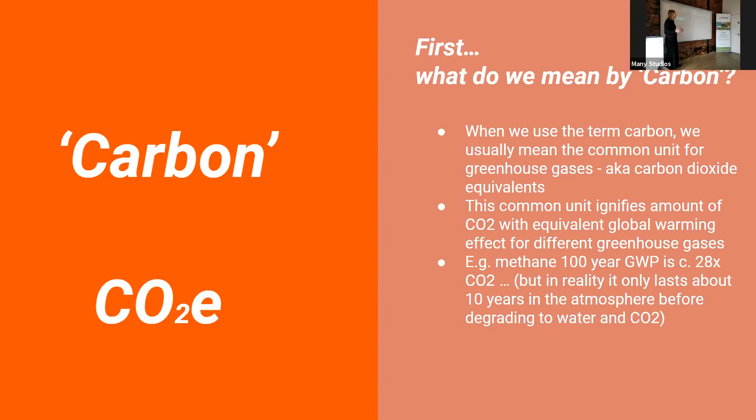But first, I think it's worth just clarifying, when we're talking about carbon today, what do we mean by carbon? Often you'll see it look like this with a little E next to carbon. And really, when we're talking about carbon, we're meaning a common unit for greenhouse gases. So we're not just talking about carbon, we're talking all greenhouse gases, all of these together, and they're measured in such a way that they are comparable in terms of carbon. So I just wanted to clear that up before I keep using the term carbon throughout my talk.

We all know the scale of the problem and the amount of change that is needed. The recent IPCC report this year flagged how our current policy scenario is putting us on track for an above 1.5 degree future scenario. And even with significant improvements to the current policy scenario, it's looking increasingly risky that we might be above the 1.5 degree range. So the rapid scale of decarbonisation that we need to make is really, really vast. And that's why it's so important that we're here in Glasgow for COP26.

In terms of a global picture, the UK historically is responsible for a really significant amount of the global cumulative carbon emissions that have been created. And also, if we look at a global picture in terms of equality and inequality, the poorest 50% of people are only responsible for around 10% of total lifestyle consumption emissions, and it's the richest 10% who are responsible for almost 50% of global carbon emissions.

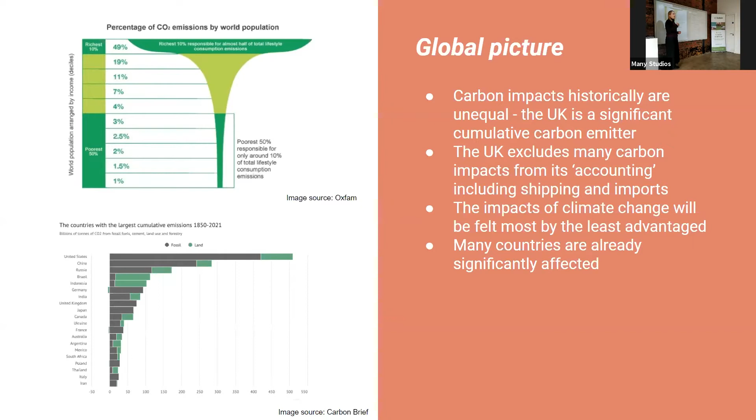So we, as people living a rich, comfortable lifestyle in the UK compared to the rest of the world, have a huge responsibility to do what we can to improve this situation and help those who have less than we do to benefit from future growth and change in their countries.

The UK GBC have set out 3 definitions for net zero: net zero carbon in terms of construction, net zero carbon in terms of operational energy, and then whole life net zero carbon. You need to be really careful when you hear people talking about delivering net zero to really challenge what scope are you measuring. Are you talking about just operational, just the energy that your building's using?

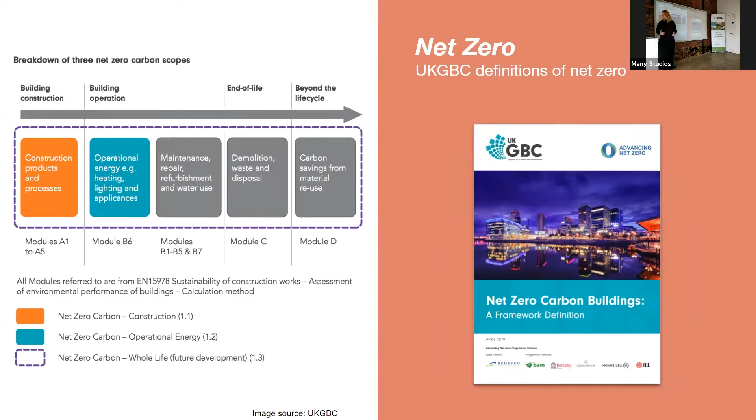Or are you talking about construction products, the actual embodied carbon that goes into making buildings? And are you talking about end of life of your building and the maintenance and repair that goes into it? We can't just be looking at a small portion of carbon now, we need to be looking at everything.

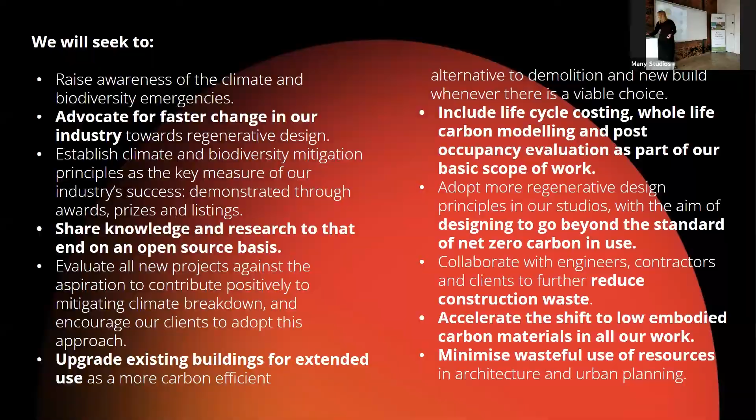So in 2019, Architects Declare was founded, and I think this was a turning point for our industry in terms of understanding and platforming embodied and whole life carbon as an issue. And I've put in bold here all of the declaration points that allude to that. And LETI's Embodied Carbon Primer was released in 2020, of which I was one of the authors. And this was another landmark piece of guidance, which I think has really created a step change in knowledge in our industry.

And as that circle gets smaller and smaller, that will become the bigger and bigger portion, and most of that increased slice of the pie is coming from the upfront embodied carbon associated with the materials and how we construct our buildings. So whole life carbon, there are industry agreed standards on how we measure embodied carbon, and I hope you're familiar with this, which is the whole life assessment matrix.

So everything in this area here is upfront carbon. So that's everything that happens before your building's even had its front door key opened. And then everything in this orange box is embodied carbon. So upfront is part of embodied, but they're not the same terms. And embodied carbon includes everything up to the end of life of the building, while whole life carbon encompasses that, as well as the operational carbon. And for infrastructure, it also incorporates user carbon, I think, for which there are emerging standards coming forward.

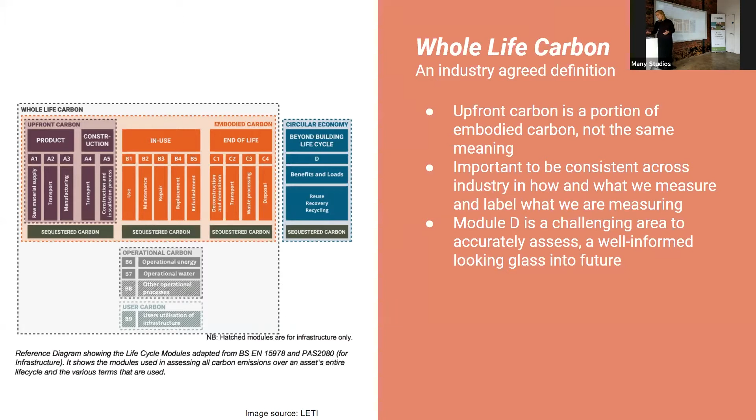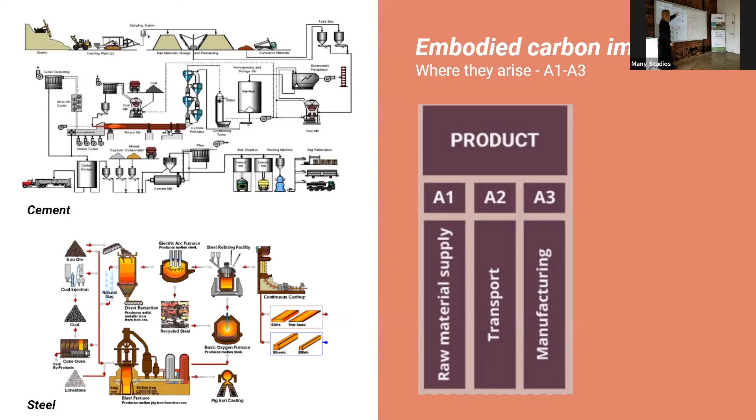All of these energy forms add up to create an embodied carbon that ends up in how you made your material that you see before you. So this concrete here went through all of these things in order to be here. And that's what we mean about embodied carbon. And most of that on those pages are fossil fuel driven at the moment.

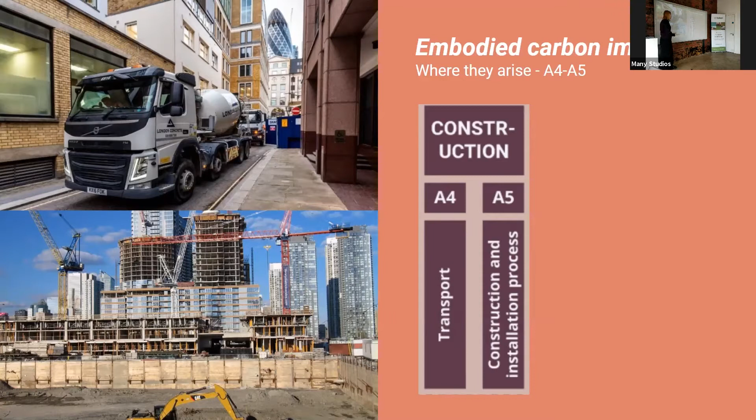Embodied carbon impacts then in A4 to A5, we're talking about on-site and transporting those materials to site, and then the processes of constructing our buildings. So any waste generated through that process, that would count in here. And also just how much energy it takes to construct our buildings, whether that's vehicles driving around in petrol and diesel vans or whatnot.

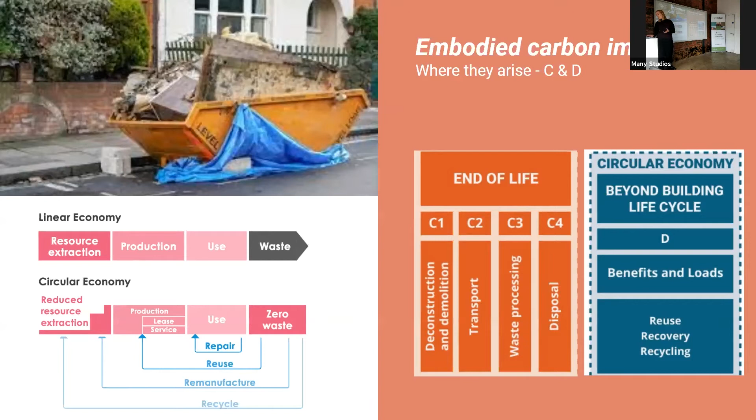And the big question for those materials is then what happens in module D and the end of life scenario. Do we keep those buildings in place for hundreds of years, in which case that's locked away, that's great, or do we send them to a landfill where they're likely to be incinerated, where they'll release a lot of carbon? That's a big question mark, which I'm sure Andrew will touch on. At the moment, we produce a huge amount of the UK's waste, and we reuse very, very few construction materials after their first life.

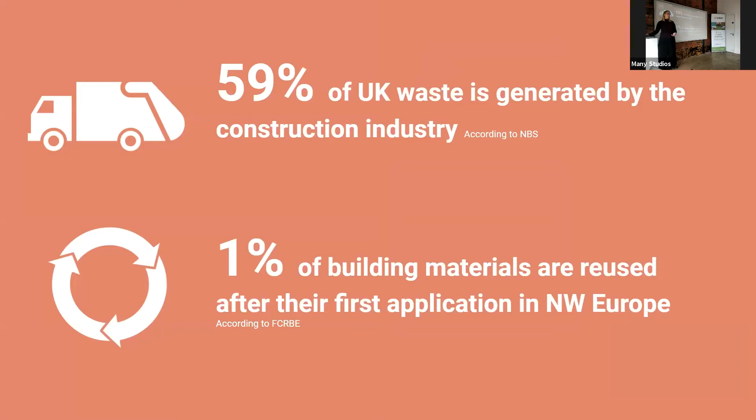And we're just producing more and more waste. So this is a huge issue that we need to address. There's loads of embodied carbon material out there.

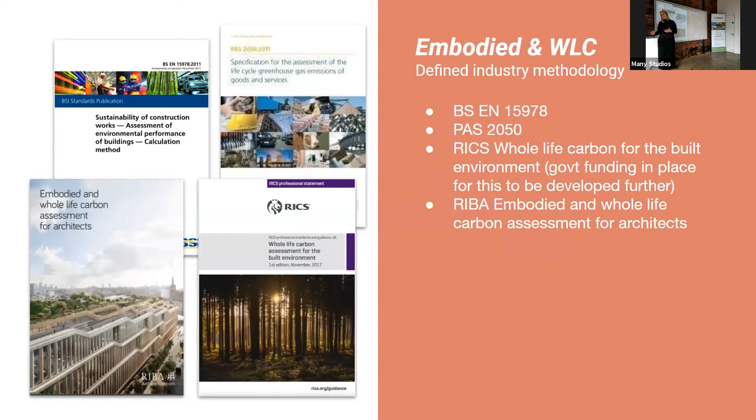These are some examples where you can look for industry agreed methodology. For us, it's probably worth looking at RIBA's Embodied and Whole Life Carbon Assessment for Architects. Essentially the fundamental calculation is you're calculating how much stuff you've designed, the carbon impact per unit of that stuff.

And timesing them together, you get the environmental impact of your building in terms of carbon. You'll find online lots of different sources for embodied carbon statistics for different materials. A good source is the ICE database, which is generic data that's really well researched. But this is a visual illustration, which I'm sure some of you will have seen, the material pyramid on materialepyramiden.dk, and it really visually shows you the different embodied impacts of different materials on a singular basis.

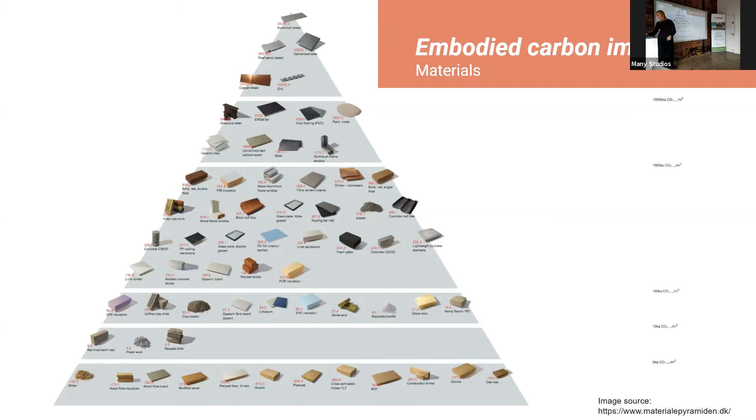But there are also tools emerging that make the job a lot easier for you, and quite a lot of really good free ones. The top tool here is HBERT, which was developed by Hawkins Brown, and the bottom tool is by Feilden Clegg Bradley Studios. This one's Revit based, really good if you've already got your model in Revit, so you might be at a later design stage maybe.

This one's really good for really early stage testing in an Excel format. So there are different tools emerging and coming forward, and there's lots available.

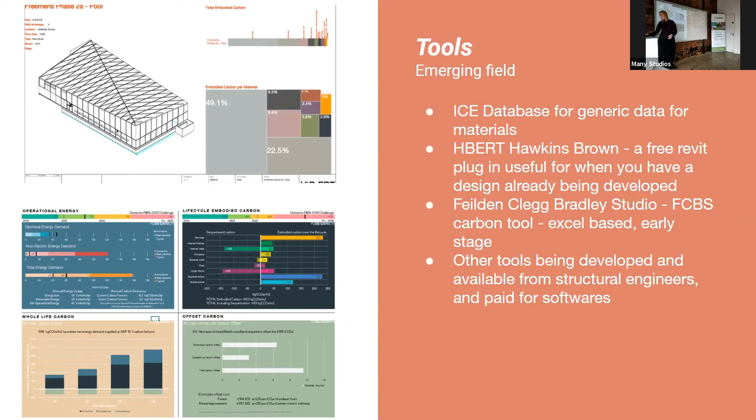But when do your decisions matter most? Really, the earlier decisions about whether we should even build this building, that's where you make the biggest carbon impact. And as soon as you start moving through the design stages, once you set your form, your volume, your heights, your spans, then you're locking in carbon impact, and it gets very difficult through the later design stages to really improve the carbon picture much.

You make a narrower and narrower scope of improvement for yourself, especially when you're on site—it's too late, you can only substitute the odd material. So it's really important to be thinking about this from day one on any design project.

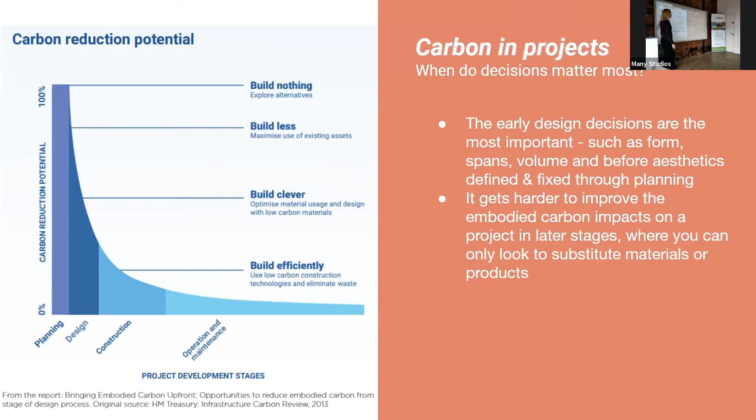So there's lots of really practical guidance out there. On the whole, if you can build less and build light, you're doing a really good job and getting going. Then it's all about building wise and trying to really improve big ticket items, which I'll show you in a sec. For example, in a normal building, your upper floors, your foundation and your envelope are really big ticket items, and there's huge potential for you to reduce the embodied carbon in these components.

And if you can engage with your whole design team, particularly structural engineers, in the early design stages, to explore options that will reduce this, then you're making really good progress to reduce the embodied carbon.

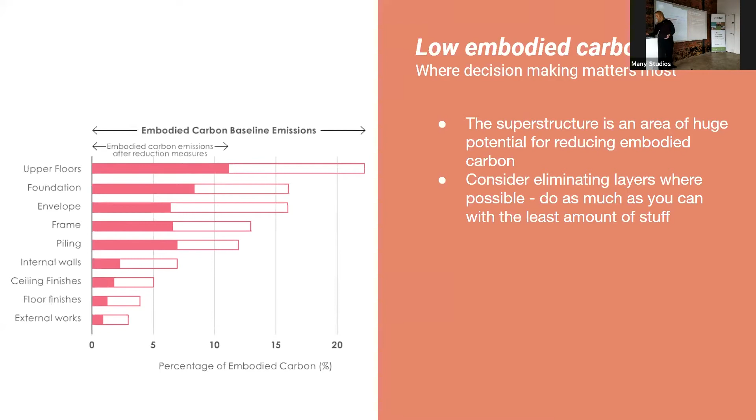That's not to say that internal finishes and smaller components don't matter, because over a whole life picture, they really, really do matter. And if you're able to eliminate anything at all, and make, for example, self-finishing materials used to limit the need for extra internal finishes, then that's a really good step as well. For example, the Cork House is an example of where the structure is acting as the final finish, and you've eliminated a layer of stuff.

For example, this is our Sky Health and Fitness Centre, designed by DRMM. Again, you see that the timber is acting as the final finish. There's nothing concealing the MEP work, we've left it all exposed, and it's as minimal as you can be in terms of the amount of layers of stuff in a building. That's what we want to see. We want to see materials working really hard to do many things: structure, aesthetics, shading, whatever. We want to be doing as many things with as little stuff as possible.

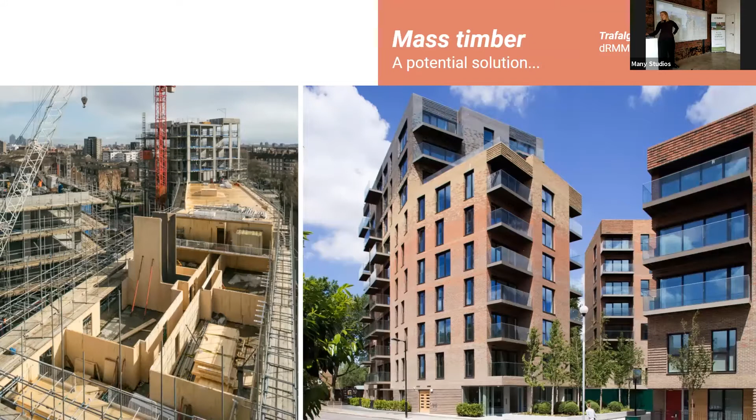With tall buildings, it gets really hard to limit your embodied carbon. Once you get beyond 12 stories, you're a bit stuck really, and you start to see really extreme diminishing returns in terms of what you can do. That said, timber is potentially a solution for taller buildings, and here's an example of a project we did in London, a tallish building in CLT. Unfortunately, legislation is making that difficult at the moment.

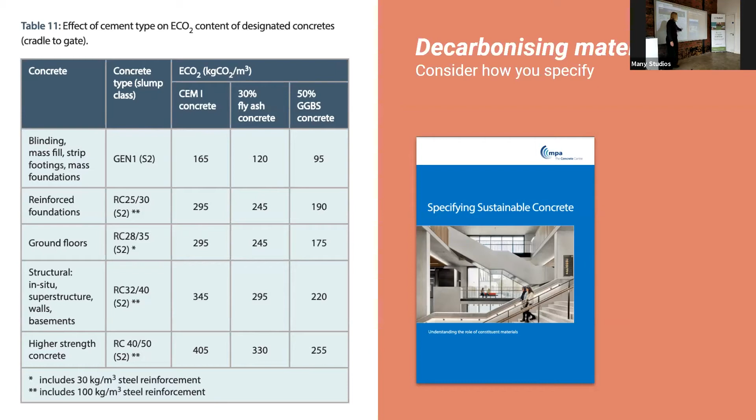It's also really important that we're not just talking about timber. We all use concrete, even those of us in the room who are designing in timber have concrete foundations. So we need to be engaging with what's best practice for concrete. This is from the Concrete Centre, a really useful piece of guidance showing you how you can reduce your embodied carbon impact through sensible specification of cement alternatives.

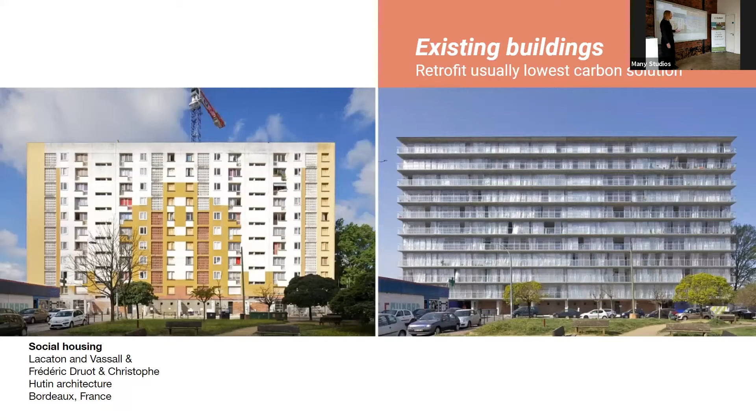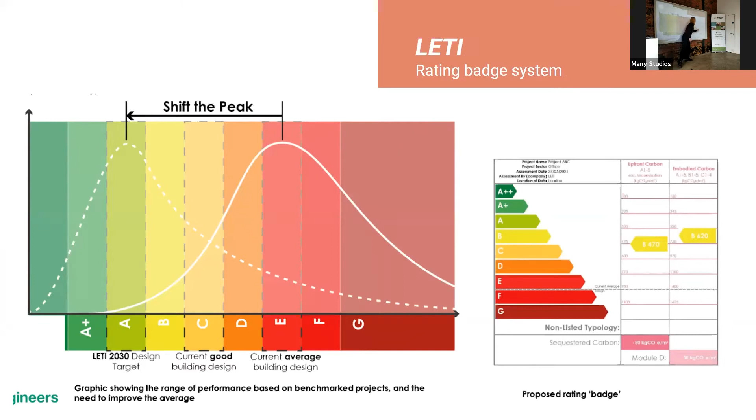You've probably seen the RIBA benchmarks. It's really important for us all to be working towards these, and also feeding back data so that RIBA can keep improving it. LETI have a rating badge system, which we've recently launched, which helps to visualize how good my building is. This has got a close relationship back to those RIBA targets.

Bennetts Associates, I think the first practice to actually do this, have measured their building's impacts on two projects against the LETI benchmarks and been really open and transparent about how they're doing. I think we all need to be a lot more transparent about how we're doing, even if the outcome isn't what we want to see. This is the kind of LETI input form used to do the benchmarking exercise.

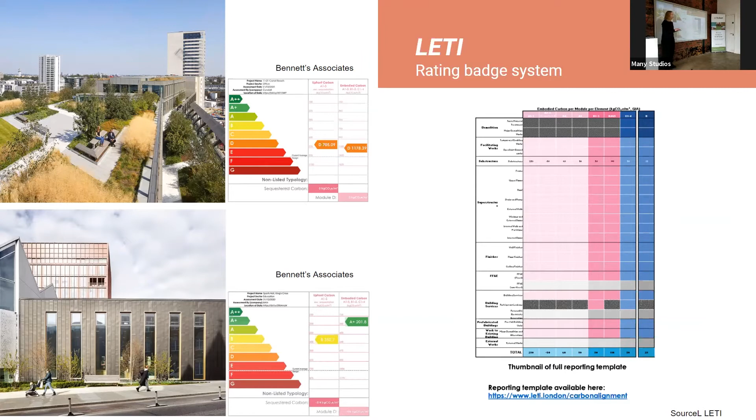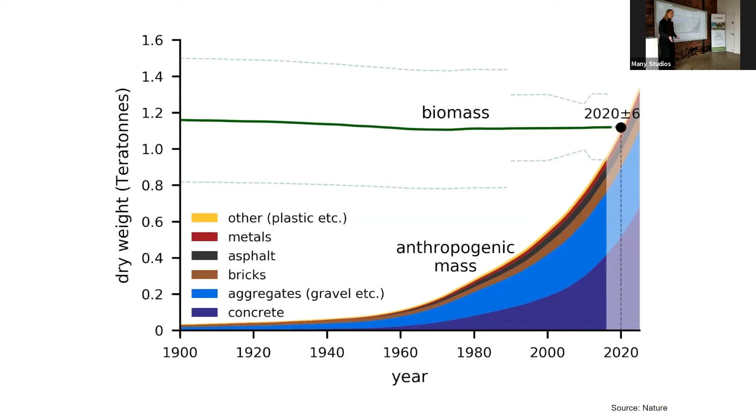We also now have more man-made materials on Earth than there is natural flora and fauna. We've got so much stuff. So I urge you to please try to find ways of using what's already here rather than making new stuff, because we're also at risk of using up finite resources. We can decarbonize concrete, but we're also running out of sand. We're using it at such a rate that nature can't replenish it anymore, and it's a depleting resource.

Also, our electrification of society relies on materials like lithium, which again are rare and finite resources, and the extraction processes for those are not always positive.

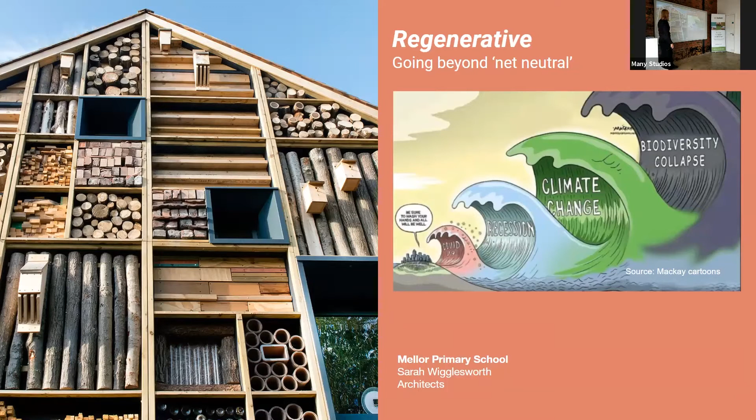So I urge you, when you're thinking about embodied carbon, to still be thinking about how to make buildings for nature. This, I think, by Sarah Wigglesworth Architects, is a good example of a low embodied carbon system, which is more than just a facade. It's also home for nature to live and thrive.

And we can also start to think at a system level about how nature feeds into the carbon system. So thinking about how we're designing for street trees and for green roofs, and the carbon sequestration that they're able to create and contribute to our systems in cities.

But we need to be really careful when we're talking about introducing, for example, green roofs, that we're conscious of the tradeoff between embodied carbon and regenerative benefits. If we're starting to plant trees on buildings, think about the impact that that's going to have on your structural design. We've got some tricky tensions in play here, and I think it's just really worth engaging with them on every project and seeing what the best thing you can do is.

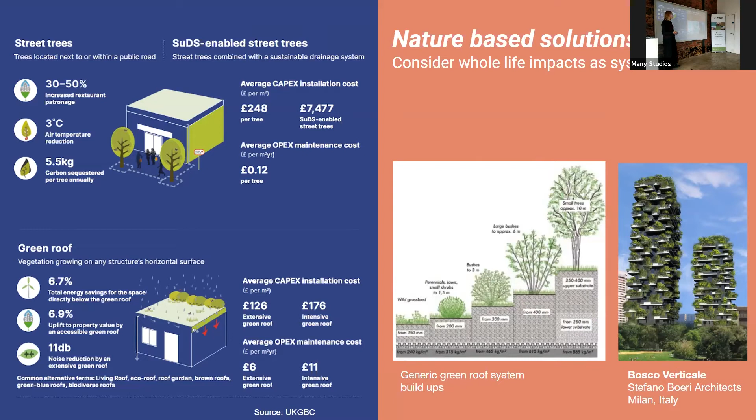Personally, I think trees are probably best left in the ground, but that's just my view. And also just to remember that our climate is changing. There's no use us designing buildings now that in 30 years can't tolerate the heat.

We need to be designing to future weather files, and we need to be designing to consider how people will keep cool and how people will actually live and work in our cities. Otherwise, we're at risk of, again, building redundancy into a system that's already flawed enough as it is.

So yeah, I think that's me done. Thank you very much.

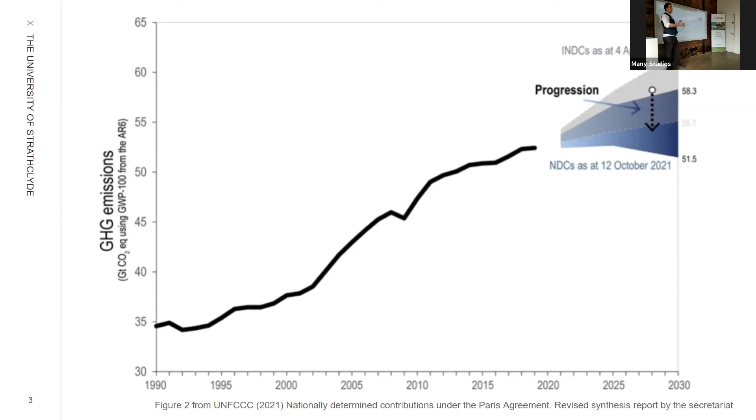What we have, though, when you zoom out to the longer term, is this huge gap between the nationally determined contributions up here and the kinds of pathways we need to be on to get down to 2 degrees or 1.5 degrees. All of the commitments we've been seeing are things around 2050, 2060, 2070 net zero targets. So there is still this huge gap in terms of near-term action that we need to close - and that's one of the key things we're talking about over the next two weeks.

Longer term, though, the good news comes from a lot of the commitments brought forward in the last couple of days. The analysis on screen here was done prior to the COP. There was an updated version published this morning, which I didn't have time to add into the slides yet - done by a different group doing the same sorts of analysis. It suggested that the long-term targets we've come forward with now, if you assume a fairly optimistic interpretation about everybody fulfilling all of them, and the trajectory you assume along that, that actually comes down now to about 1.9 degrees.

So this is the first time we've had a set of global commitments that notionally could bring that 2-degree goal back into play - and that's as of this morning. Now, obviously, there's still a huge challenge in delivering all of those reductions, delivering upon all of those targets and so on, but that's how far we've moved in those 6 years since Paris. The big challenge, though, is closing that near-term gap - getting us back down onto those pathways over the next decade or so.

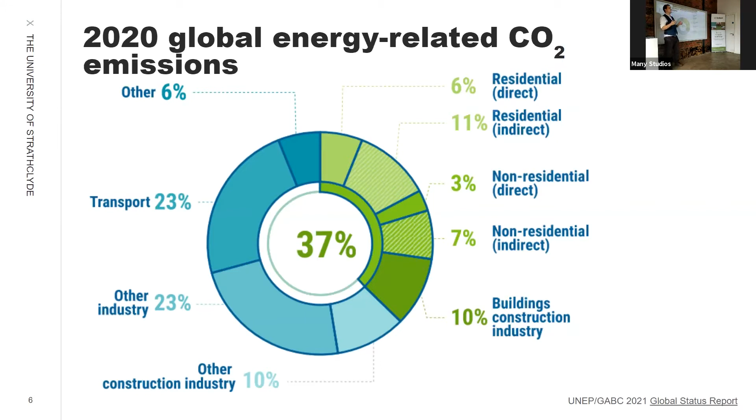The one thing I would say is anytime you see somebody quote that 10% figure, always think about what that includes, because historically it has basically included the impact of material production. It hasn't included things like the impact of transporting all those materials to site. So 10% is really a lower bound—really you're talking about 20%.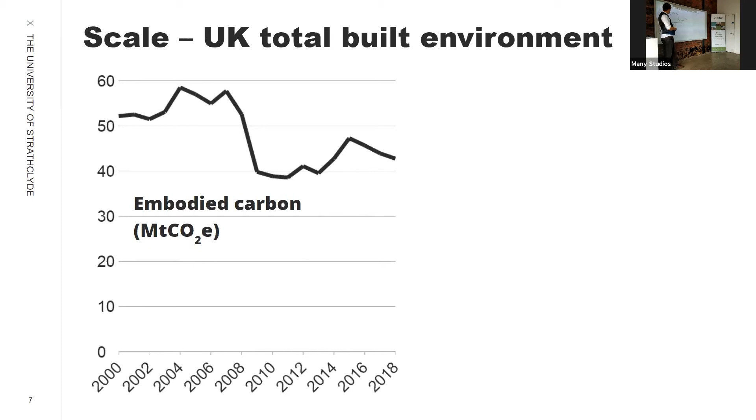What's actually underlying that is two trends: increases in what we're building, and reductions in the carbon intensity of the supply chain—the production of materials and so on. There's a couple of interesting things to point out with these two competing trends that have left us on a broadly flat overall trend.

That's essentially the global financial crisis, where we had the worst and fourth worst annual drops in construction output in the UK on record, in the space of a very short period. That was the only period where we actually made any substantial reductions in our total embodied carbon, because quite simply we stopped building. Since then, construction output has returned back up towards where it was before—we're building again.

And we've had a slowing of the improvements in the carbon intensity of supply chains. Back in the 90s and early 2000s, there was lots of easy stuff you could do—taking coal off the grid, the kinds of transformations we saw in the cement industry. Now we're having much more gradual, slower gains in carbon intensity.

So going forward, you've got to do one of two things. You either have to massively accelerate the reduction in the carbon intensity of supply chains—there's lots of discussion about technologies like carbon capture and storage and hydrogen steel that might do that—but you also have to think about how much we're going to be building in future, because it's those two things that will really determine what trend this follows going forward.

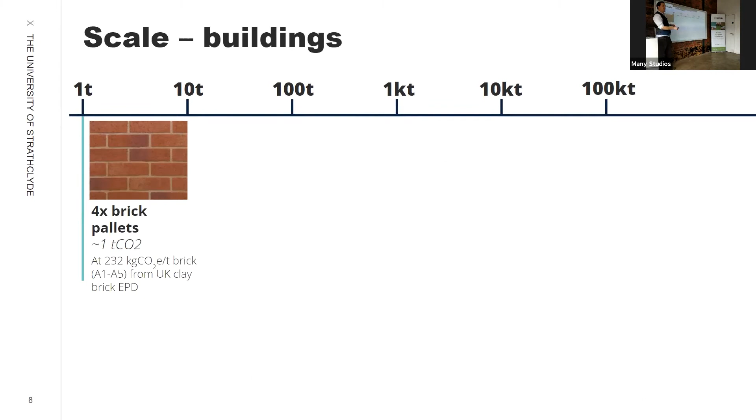Just to give you a sense, from a ton all the way up: 1 ton of embodied carbon in the UK at the moment will probably get you about 4 pallets of bricks. I've assumed if you turned up to an event like this, you know what a pallet of bricks looks like—that's 1 ton, so keep that in your head. That's for UK average bricks at the moment.

By the time you get to like 10 tons or 100 tons, you're probably talking about 1 very large house or 2 small green ones. By the time you're working your way up towards hundreds of tons or 1,000 tons, you're probably talking about small to mid-sized, or particularly green, commercial developments.

For example, Kat mentioned this great new timber sports hall that Bennetts has done. That 709 tons CO2 upfront carbon sequesters 638 of that in the timber, so you can see the kind of scale of potential benefit there if you want to include that.

Once you get beyond 1,000 tons, 10,000 tons, etc., you're talking about quite large commercial developments. For instance, here's 5 Broadgate, if anyone's familiar with that—more like 50,000 tons of CO2 upfront to practical completion there.

And if you're working for a client organization, you might be talking beyond that in terms of your pipeline. For instance, Landsec have started recently publishing what the estimated embodied carbon of their development pipeline is, which I really applaud them for doing.

But there you're talking, you know, a couple 100,000 tons of embodied carbon in their next 6 developments. And so that's the sort of, you know, scale that you can influence if you're working in this industry.

If you work on infrastructure assets, oh, sorry, this little blue dot is kind of like what Kat was saying before of, if I lived twice as carbon intensive a lifestyle as I do, and nobody decarbonized any of those activities in the future, and I live to be 100, which as a Glaswegian male is statistically very unlikely, then that is maybe where at the worst case scenario I could get my personal carbon footprint to. So almost everything you're working on will be an order of magnitude or more bigger.

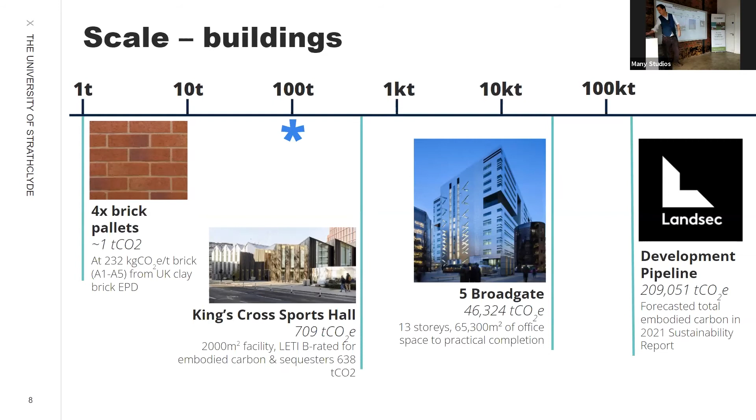And if you work on infrastructure, that scale really starts at 10,000 tons and goes up from there. So, you know, 100,000 tons probably gets you a couple of miles of motorway with a junction at either end. By the time you get to 1 million tons, you're talking about the biggest road building project in the UK in the last few years.

Beyond 1 million tons, a few million tons might get you a third runway at Heathrow. And if you go past 10 million tons, you're really only talking about mega projects like HS2. So that's your kind of top end of the spectrum in terms of carbon scale.

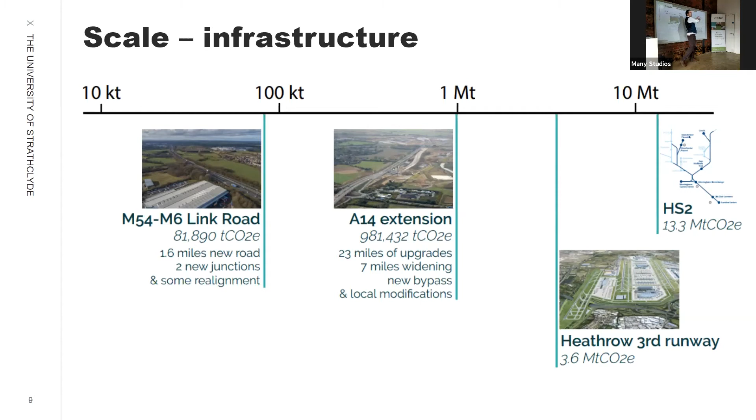The general approach that these European countries are taking is essentially come up with some sort of roadmap at the start, give a bit of clarity to the industry on what's going to happen going forward, and say, okay, from this date, we're going to require you to report your embodied carbon on all your projects, or all your projects above a certain size. On those projects, we'll ask for you to report against a standard methodology. We'll give you tools to do this. We will give you a national database. We will give you a national methodology, etc.

You follow those. Once we've gathered that data for a period of time, typically that seems to be a few years, then we'll start setting limits based on that data that's returned to us. And we'll say your building has to be below this many kilograms of CO2e per square meter, etc. And that whole process of development, from first saying we're going to take action on this through to setting limits and so on, that's going to be a multi-year process for all of these kinds of countries. The Dutch have kind of already done it, but they're sort of the outlier in terms of having cracked on with this a decade ago.

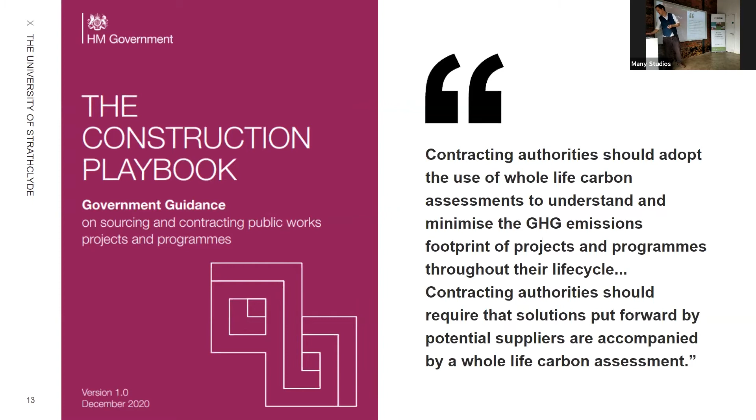The net zero strategy, which came out a couple of weeks ago, represents a little bit of a move forward, and it actually mentions embodied carbon. And it puts out this statement essentially saying the government aims to support action in this, improving on reporting with a view to exploring a maximum level for new builds in the future. Now, there's no real specific timeline or actions for development of that in the strategy.

And that was backed up in their recent response to the Committee on Climate Change. Sorry, that's a really old way of talking about it. The Climate Change Committee, I always forget they rebranded. Every year they submit a progress report to Parliament, which includes a bunch of specific recommendations to different departments. Every year for the last 3 years, they have said you should include embodied carbon and start measuring and reducing that. And you need the regulations in order to do that.

Last year, the equivalent statement was essentially a fob off of saying, well, we would need a methodology to be able to do that, to which the response was, well, there's all the methodologies on Kat's slide before, the RICS statement that's been there for 4 years, etc. This year, it was a really distinct evolution because it basically said, yeah, we expect to do something on this in the future. What that will be and what the timeline is at the moment remains unknown.

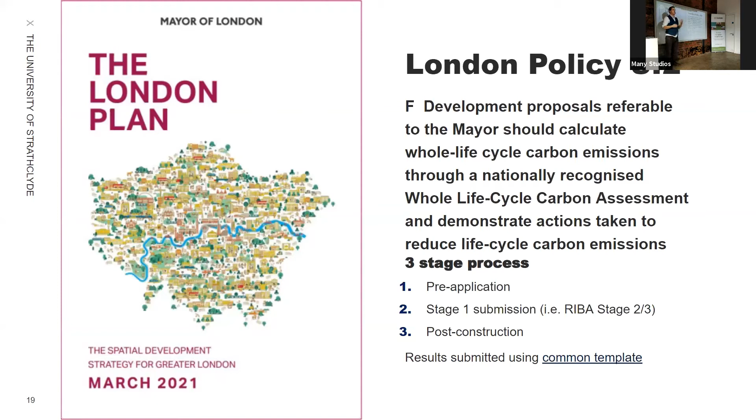Now, they haven't yet taken a position on what they'll do with this data over time, but if they're following the same sort of model as all of those European countries I mentioned before, then you would assume over time you would use that data to then form the basis of limits for future projects.

As Joe mentioned, if you think we should be including embodied carbon in building regulations, I strongly recommend you go to part-z.uk, where you can read a set of proposals from a group of us from the industry. And, well, yeah, I will count myself as the industry, even though I'm an academic. Maybe I'm the token academic on this one.

This is basically a set of proposals around exactly what the wording of the building regulations could look like, what an approved document would look like for it, and a whole lot of commentary that sets out why we've written it like that. What we've been doing throughout this whole process since we launched this is gathering feedback from absolutely everybody who wants to speak to us about it.

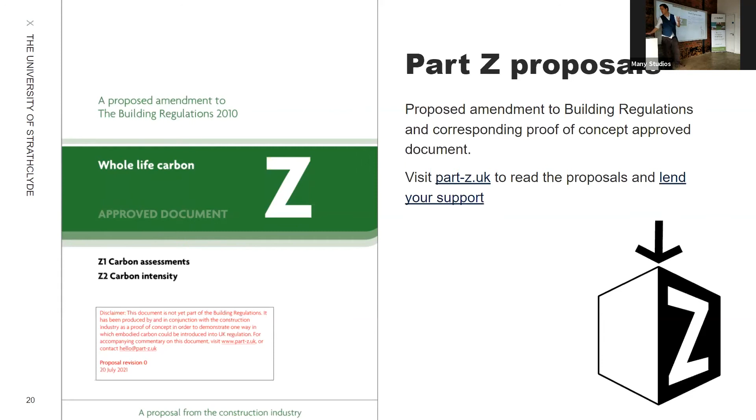And I'd say the broad thing from that is a general consensus that this is a good thing to do. We should do it. We now have over 114 statements of support on the website from different companies, lots of household names, everything from SMEs up to, we've now added the UK's largest active asset manager. In the last week, we have several of the UK's top 10 contractors on there. We have statements of support from RIBA, IStructE, CIBSE, etc.

So I think we can try and build a reasonable consensus about this, and we're having a parliamentary launch of this the week after COP finishes. So the more support we can demonstrate at that and say, look, there is real widespread industry support for this, the better. So please consider submitting a statement of support if you haven't already.

2 final quick plugs if you're around for the rest of this week or next week for the COP.

The UK Green Building Council will be launching their net zero whole life carbon roadmap for the UK built environment on Thursday of next week, which sets out a whole package of analysis and policy recommendations, not just about embodied carbon, but also operational carbon and what we need to do about it. You can sign up to it, it'll be streamed. It's in the Blue Zone if you want to attend and have a delegate pass. If not, I think you can stream it online.

Tomorrow night, the UK Green Building Council are launching their Scottish regional branch. I'll be along at that, hopefully to see some of you there to talk about whether we could do a Part Z for the Scottish regs, and whether we could get a group together to do it. So that's all from me. Download the slides and hopefully see them in a bit more detail. Thanks very much.

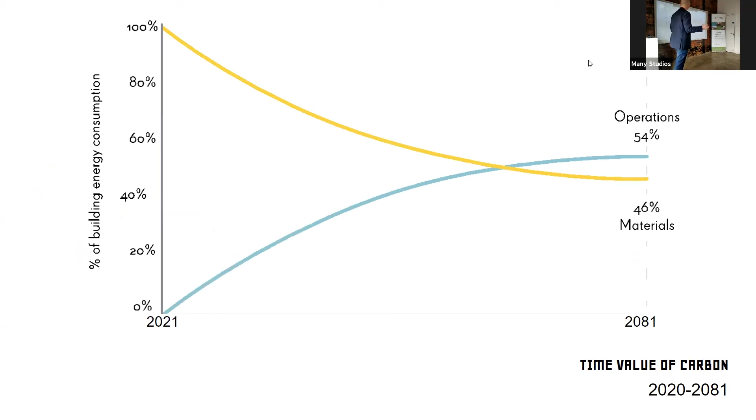And then we talk to our clients about embodied carbon, and Kat showed a few diagrams which I've already emailed you. This is one we often use with clients and politicians: if we build a building in 2021, 100% of that carbon is the materials in the construction process. As time goes on, for the 60 years we notionally give a building to live, that 100% of the materials—this is for a project of 120 apartments, a 10-story project in concrete—would be, over the years, just under half the embodied carbon of the total carbon footprint of the building after 60 years. It's about 50-50, as I think Yannick said.

Now, there are no magic inventions. We can't just keep practicing as architects and hope somebody will invent something that reduces our responsibility. It means that by 2040 we need to reduce the amount of concrete we use by 45% across all of our projects, everything that we do, all the infrastructure and everything.

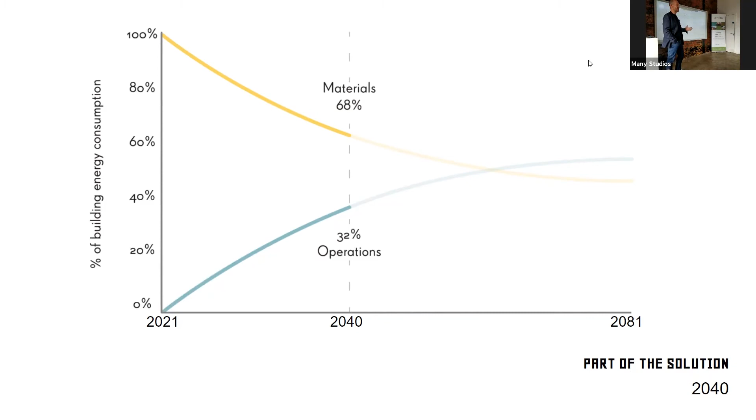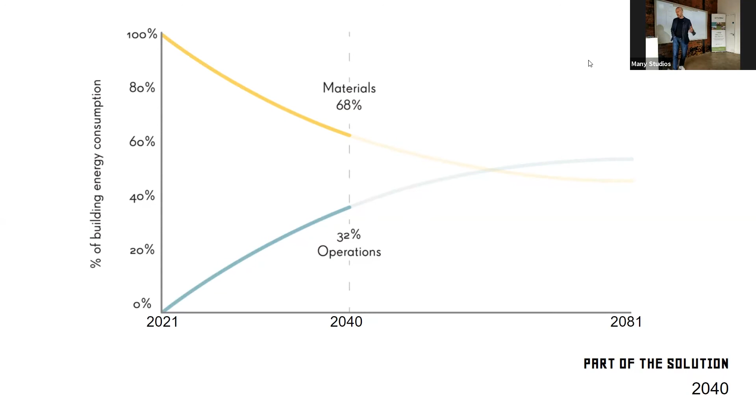If you think about how long most of our projects take—certainly for a big project in the office, say 5 or 6 years from the first phone call to people moving in is fairly typical—this is happening to us right now, and so the changes we need to make as practices need to happen. And we know we're up against it slightly as well.

Yeah, because they spend a lot on PR and a lot lobbying our government and lobbying industry. They used to sit in the front row whenever I did a talk, and they don't do that anymore. Not you, no.

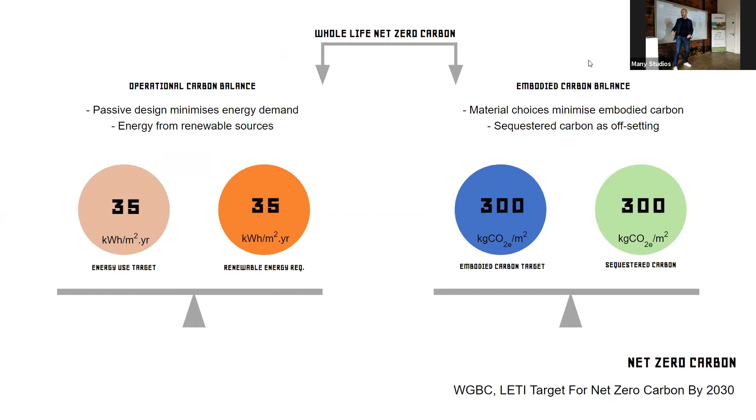And how we get to net zero carbon as practices, just in terms of the energy use targets and the embodied carbon targets of different buildings, is becoming relatively clear, so I'm going to skip past that.

One of the interesting things, because Janet was talking about it just now, is that in the last six months we found that in the European Union, all the environmental and social governance reports are now legal and mandatory. That means investment companies that have signed up to an ESG target, which is 78% of all investment funds globally, have now signed up to ESG targets.

So that means all the money that pays for all the buildings that we build is pretty much signed up to ESG targets. And now, as of last year, when you report your ESG target, it's a legal requirement to do that and to incorporate embodied carbon within that.

So in the last six months, most of the new work that we've got as a practice hasn't come from developers. It's come directly from investors and from the investment market, who are not getting the buildings that they want from developers and contractors, and so are going direct to architectural practices to ask them to build the buildings that the funds actually require.

Now, I think that's really quite interesting, quite exciting in terms of how different policies in different places have implications that one might not necessarily have foreseen.

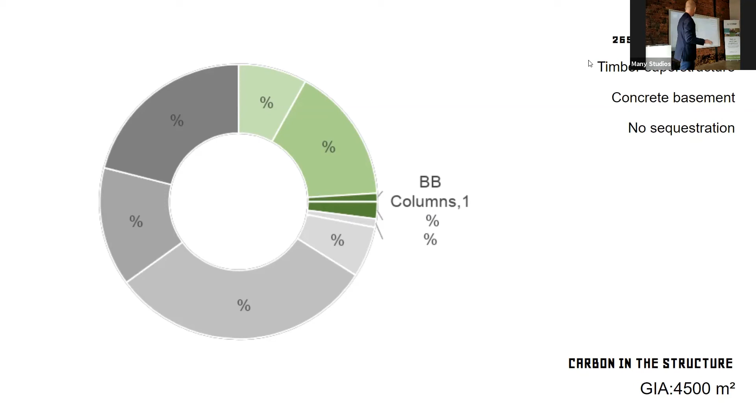So these are the sort of calculations that we make as we go through. And this is our own in-house method of recording, which is gleaned from both the Hawkins Brown method and from the Feilden Clegg method as well, with bits of other pieces in it too.

You lose carbon over the years, so you reach this kind of equilibrium with storage of carbon - that's 70% of the volume of the tree. Now, when you cut down that tree and make it into a building, you store that carbon, hopefully for more than 60 years. But can you count that carbon in the tree? Because it was already there. So just by cutting it down and owning it as a human, does that mean you can count it?

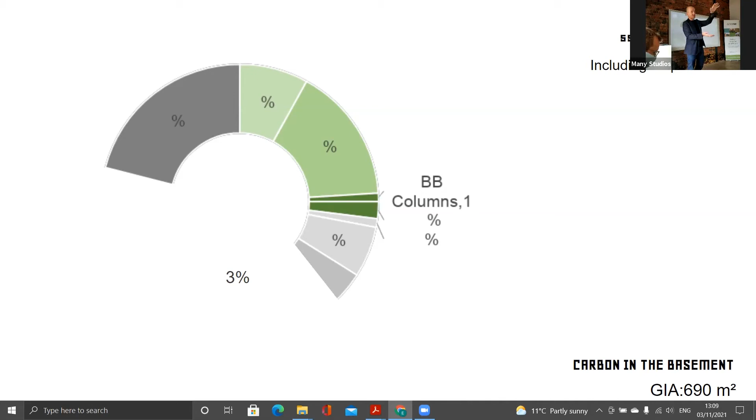I don't think so. I think that if you use a tree from a managed and certified forest, then when you cut it down you have to grow 4 to 5 trees in its place. So when those trees grow, then you have sequestration, because in a way it's an on-site offset.

The other thing about sequestration is the more you count sequestration, the more it encourages you to use lots of timber, because the more timber you use, the less carbon you have. So it's a really tricky one, which I think we need to get better at describing as an on-site offset.

Now, when we make a pre-application for every building where the client has asked us for a basement, we do two drawings at the very beginning: one drawing, in that instance, would be a 7-story building with no basement, and a 6-story building with a basement. Our clients love it because to build a basement is about 5 times the price of a regular floor. But the local authorities still, you know - anyway, so that's an ongoing conversation.

The other thing is that basements are bad for soil quality, bad for floodplains, bad for flood levels, all that kind of thing. So I think a campaign against basements is a good idea - they're horrid to work and live in. And also, people don't really put their bikes in them - I don't believe that they do, certainly.

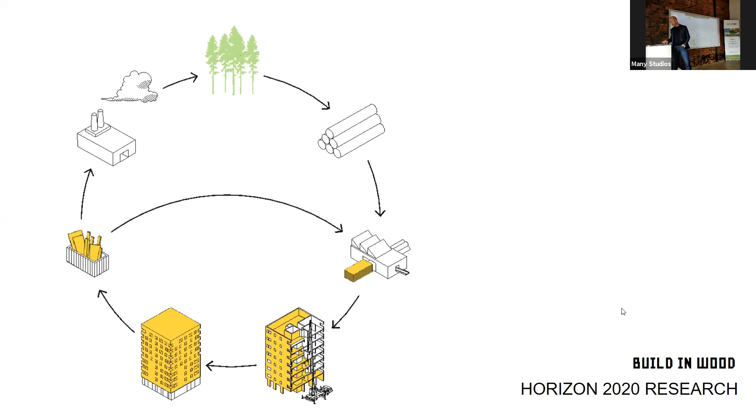Anyway, one of the things we're involved in at the moment is the Build in Wood research program, a 10 million euro research program over 4 years. Excitingly, even though we left the European Union, we didn't leave the Horizon 2020 research program, so we are now the 27+1 - which sounds a bit too positive to me. Part of that program is assessing policy and life cycle analysis.

One of the things the timber industry has really suffered from over the last few years is that they've all kind of sat on their laurels and not invested any money in life cycle analysis, while the concrete and steel industry are having things like Steel Zero and talking about GGBS - an aggregate used as a cement replacement for concrete, the vast majority of which is actually made in China.

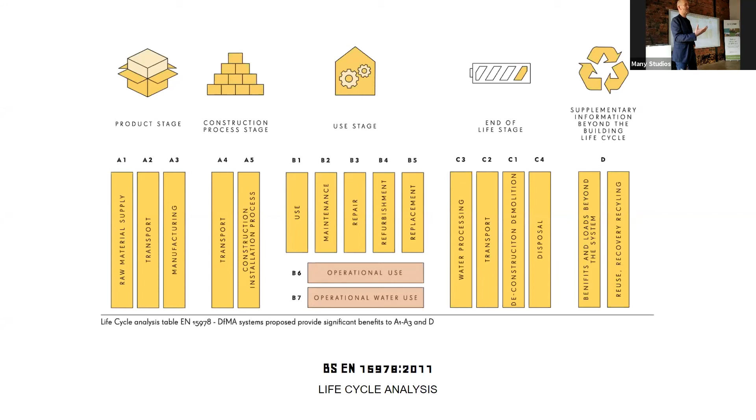So we're working with the European Union to reappraise all the life cycle analysis of timber across the European market and the value chain at the moment. Part of that Build in Wood program is a whole kind of website and analysis, open source documentation, including work on basements and fire codes in all 27 nations, plus 1.

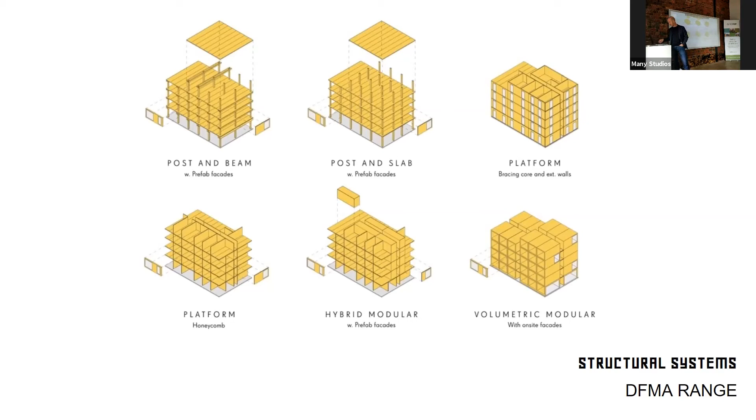And structural systems, parametric models, all kind of downloaded in Revit. That will be emerging in the next year or so. That research structure is working through kind of... I've never seen this slide before this morning, so I'll just read through it. You can see the open source will be implicit to every region, how it's begun, described, how it's arrived at, and then worked examples of where that's happened. So that will all be available online.

In the UK, what we're doing with the Laudes Foundation, Built by Nature Fund, is we are designing what we're calling the new model building, which is a 6-story, under 18-meter, pre-warranty timber residential building, multi-story, multi-family residential building that we can build entirely in timber within current building regulations and pre-warranty by warranty providers, approved by the mortgage lenders, signed off by fire brigades and insurance agents.

21st of December. And it will be complete and online as a completely open source document.

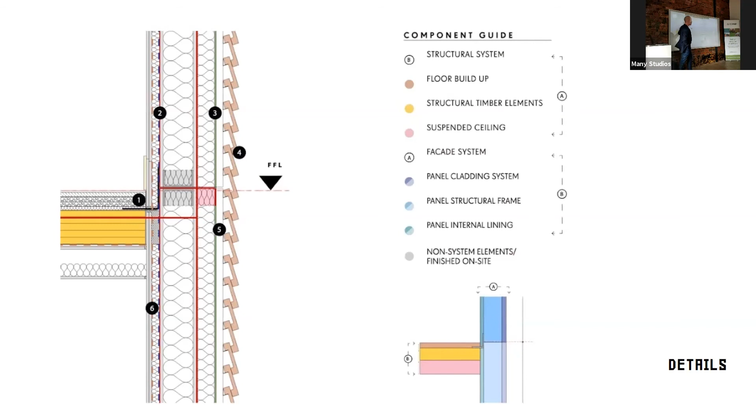It includes at the moment about 55 different sections and details, each one of which can be applied to any shape or context of building for residential use up to 18 meters. And those details can be drawn out really simply to understand what we need to do and then how we can go about doing it. So it's the idea of principle and then a worked example of each one of those details.

And then all put together into one building. It looks a little bit like this at the moment. But then this morning, we were told by the warranty provider that they want the CLT roof to be pitched at 40%.

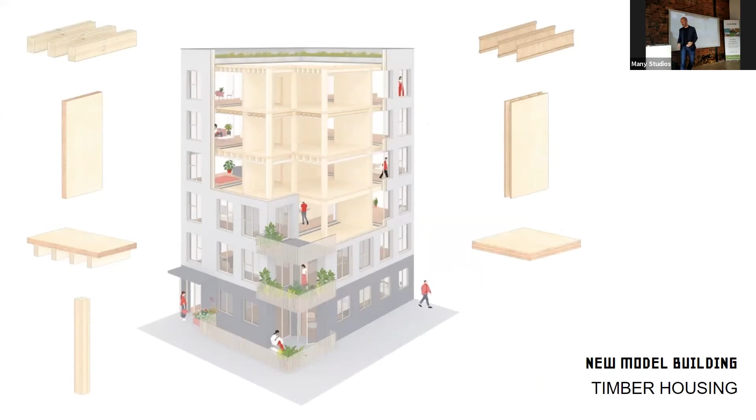6 stories. Yeah. And then as part of that, we'll be doing a carbon target analysis as part of that work as well, which will demonstrate that without any sequestration, the new model building will be below the LETI 2030 target, substantially below.

That's the line, and we'll see it. That's the other line, so we're below it. It will be below the LETI targets for construction.

And although it's frustrating, at 18 meters, while the whole rest of the world is changing their building codes to encourage timber buildings, Amsterdam announced yesterday that 30% of all government-funded buildings will be built from timber, whereas the GLA announced that they won't give out any grant to any building with timber in it.

We wrote straight back to the GLA and said that includes windows. And they replied that they're not sure about that yet. And then we asked them if it included doors, and they said they weren't sure about that either, or timber lintels over window openings, but they're not sure about that either. So then we asked them which experts they had conferred with to arrive at this policy, and they weren't sure about that either.

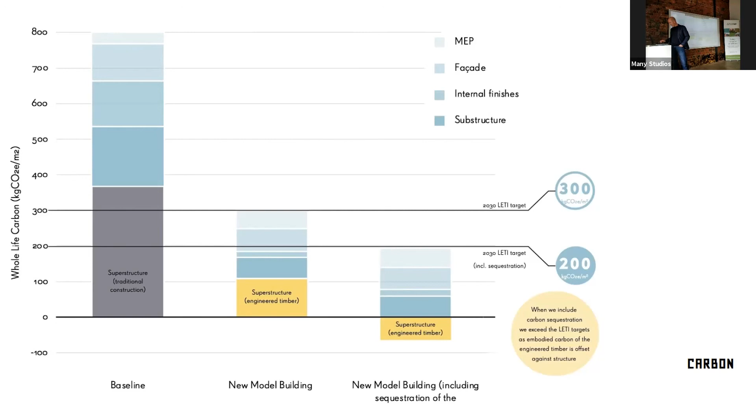So I just wanted to talk to you about, so this is where we... I know, and we're on that journey, I hope, with them. But we did point out it's sort of, anyway, a Gove-ish sort of approach of policy without expertise.

So this is a drawing that we enjoy in the office. This is the Gartner hype cycle, and this is about a journey through our career in timber. What happens is, in 2003, we had a technology trigger. My technology trigger was meeting a small Austrian gentleman in a material centre between sheep's wool insulation and hempcrete, and sat and chatted to him, which led to the building. And then that building went through 2007, 2008, 2017, building big timber buildings, 600 buildings across the UK built from CLT, massive reductions in embodied carbon, and a peak of inflated expectation.

And then we had a change in building regulations. We lost most of the projects that we had in the office, and we are in a slow trough of disillusionment, which is where we're thinking, what the hell are we doing? Why do we bother? Why do we try? But I can see this even now, this kind of slope of enlightenment that is beginning here in Glasgow, and this slope of enlightenment will take us as a practice to that plateau for which we cherish. Thank you.

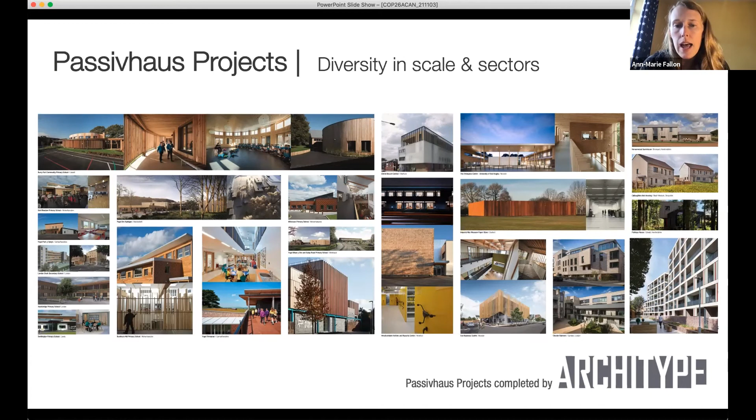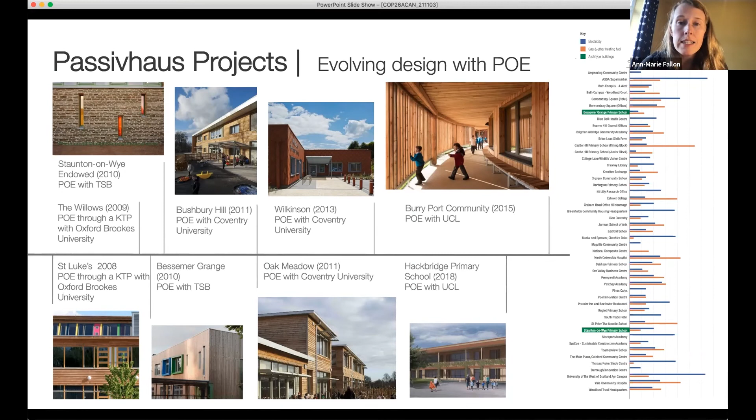We do try and follow form and function principles and try and bring a new kind of energy vernacular to the projects that we design, especially over the last 15 years or so. And a lot of that is underpinned by our own lessons learned from our own projects. So, the RIBA Plan of Work and the Building Performance Network, there's new performance standards coming out there that are really emphasizing this. And I know it's not the focus of the talk today, but even from an embodied carbon perspective, as well as whole life carbon perspective, it's all very good that we talk the talk here. We need to be able to go back and actually evidence these buildings are actually hitting those carbon emissions, and that there's no slip in how those buildings are performing in operational and embodied carbon terms over their lifetime.

So a tale of three. I was going to bring you through a new build timber frame project here in Edinburgh. A project we completed six years ago, the Enterprise Centre, just a revisit of that project and the post-occupancy analysis and the whole life carbon analysis. And then our latest project, one of the biggest retrofit projects in the UK at the moment, to the EnerPHit standard in Cambridge, which also has a low embodied carbon brief requirement in relation to the materials that we're using for retrofit. And we see retrofit, as many have already mentioned today, being a huge area of growth in actually getting to grips with what net zero carbon agenda and policies mean.

And backing up all the speakers here, there's a huge disparity around how net zero carbon is interpreted, even in just operational energy terms. So hopefully with some of the examples here, we can illustrate a bit more of that. So my presentation is more about application of the concepts and how we approach projects.

And I think we mustn't forget the position of the contractor and the supply chain in all our conversations around carbon. So everybody sitting in the room, as designers, as clients, you're passionate, you have an awareness, ACAN, LETI, RIBA, there's a huge awareness in the industry, but there's a huge knowledge gap in actually implementing a lot of this. So we don't have too many Andrews in the UK or Architypes yet. And what we really need to see is 100 Architype practices and thousands of Andrews so that this type of construction can actually be delivered.

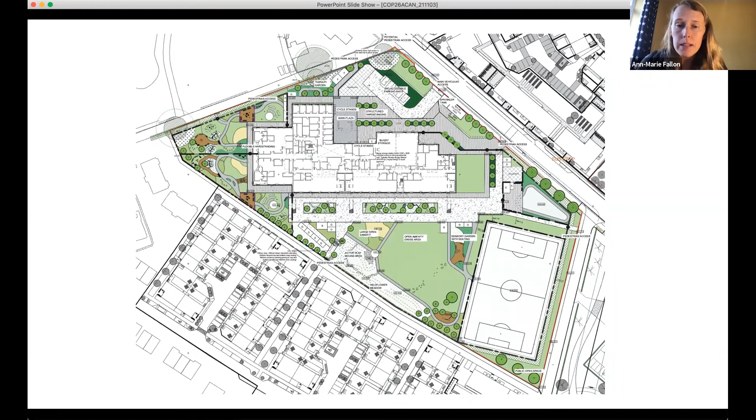And part of the wider sustainability angle here is that where we're creating new buildings in the Edinburgh City Council region or in other local authorities, we're trying to consolidate community assets. So it's not just a primary school, it's a nursery and an NHS surgery. And it's for a new development, Maybury, just southwest of Edinburgh on the way out to the airport. So there's a consciousness around new build, an awareness of how we need to consolidate assets and create very high quality buildings moving forward into the future.

Another thing about whole life carbon, or creating buildings that are built for adaptation and flexibility, is that much of this school is built with open plan in mind.

So future educational pedagogies, future functions or uses of this building have almost been pre-planned into the layout and section and plan to allow that flexibility and adaptability of use. Because again, Kat touched on it earlier, and Yannick, we can't continuously think, well, in 50 years' time, we're going to just demolish all the buildings we're building today and build a better functional building suitable for tomorrow's future. We need to build that future creation into buildings now.

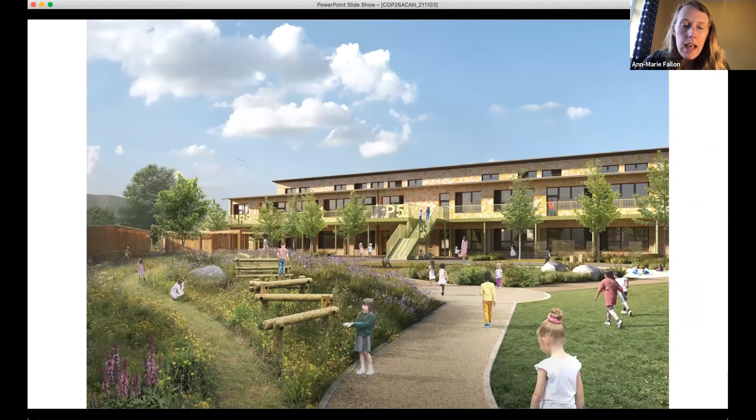So it's a timber frame building. This is one of the pathway projects for the Net Zero Carbon public sector building standard. I didn't come up with the name for that document, but hopefully someone comes up with a nice acronym so it can roll off the tongue.

I think what it's done for us, and again, coming back to the supply chain and the contractual situation that we're in, and again, Andrew touched on this, is that we are working in an environment, particularly in Scotland, where at scale, large scale timber frame is not common. It's not a common approach. It's a very limited supply chain. And it's a big journey for the industry at the moment to really look at timber frame, looking at self-manufacturing and innovation to actually be able to start producing this scale of timber frame kit in Scotland, and that's something that these projects are really testing and demonstrating.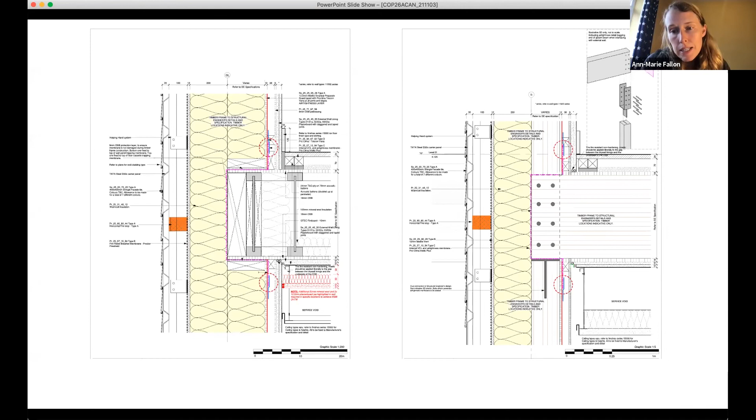So Maybury is a mix of timber frame and CLT. And as just an example, this isn't off that particular school, on another school where, again, we come to the client with those choices and we say, we can look at various different life cycles with you. Like Hawkins Brown and Feilden Clegg Bradley, we have our own in-house tool that actually links the RICS methodology of quantitative capital cost, as well as the operational energy, to the embodied carbon and whole life carbon calculation. So you can get a really, really full picture. And here we're just looking at particular stages of use and the emissions.

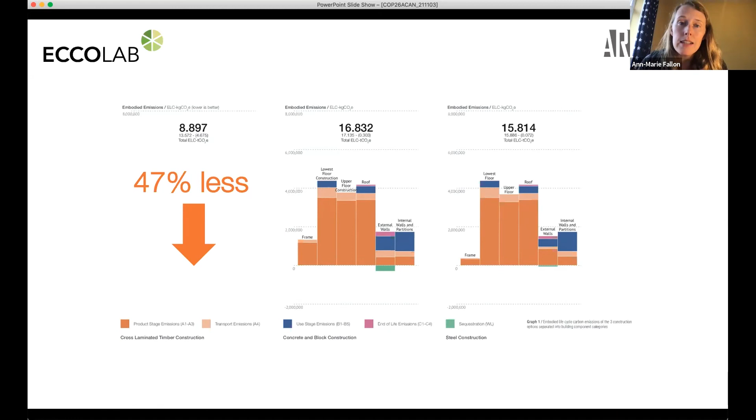And, again, backing up what we've all been saying today, looking at 47% emissions reduction when you're able to choose a timber frame building in relation to those upfront emissions and being aware of that. And again, there is that question around sequestration and how we deal with that in the whole life carbon universe, and then the longevity aspect and the area of the building life we can't control really at the end, because how many governments are going to be in play before we get to the end of that building's life. And our biggest impact is now in terms of reducing those upfront emissions.

So the project is just running through the design stage, and again, part of that exemplar set that's influencing public sector policy, which has been really, really exciting. And I think when we talk about whole life carbon and embodied carbon, it's very easy to forget that actually the operational carbon and the building performance and the building fabric is really critical to driving down those figures as well. As you know, Andrew had some amazing graphs showing that.

So the Enterprise Centre for the University of East Anglia in Norwich had a really, really ambitious brief. This was back when we met the client in 2012 actually, where they had really, really high aspirations. And I don't believe that there was a building in the country at the time that was trying to hit all of these targets as part of the brief requirements. So a key one was the 100-year design life and evidencing that to them in terms of climate change adaptation as well. Passivhaus certification, we had BREEAM in there. They really just threw the Magnificent Seven at us in relation to what they wanted to aspire and achieve to. And we'll come on to some of these aspects in a moment.

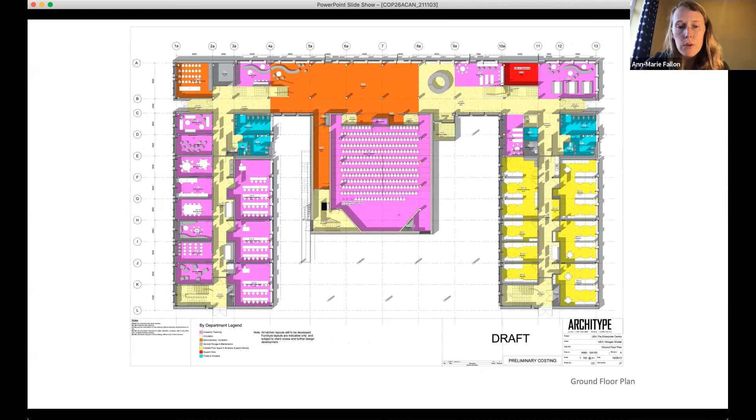Very basic, simple two-story university building with a mixture of learning and teaching spaces and hub and enterprise startup spaces. So the functionality of this building was for postgraduates and business startups, as well as being a central social space for the university as well. Very simple, rational section. So timber frame, elevations very much responding to our orientation and the glazing, as well as the internal brief requirements that we need for the building. All supplemented off a central MVHR unit. This was pre-decarbonisation, so there's a gas boiler heating this building, way back when it was completed in 2015.

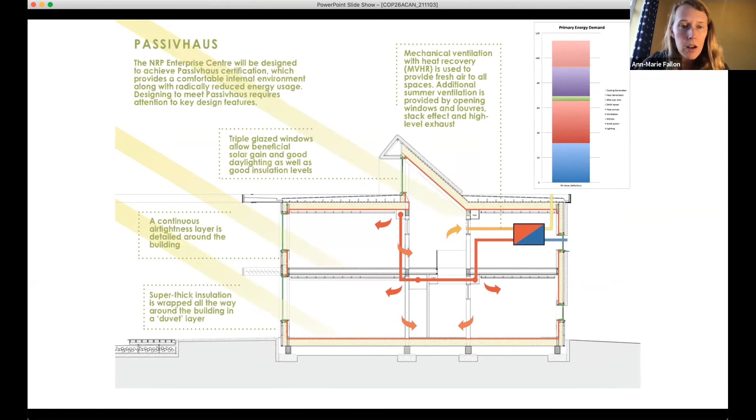And the other high performance fabric aspects that we have become familiar with within this group of people - I suppose it's a little bit like Marmite, you either love or hate that we were very innovative with taking straw and thatching to a new beginning on the Enterprise Centre, where we were able to format it into vertical cladding panels.

This involved the requirement to work with local supply chains. So again, a very low embodied carbon initiative and innovation, where master thatchers in Norwich and down the southwest of England - it's a dying craft. There was a real attempt made, when we delivered on it, to reinvigorate that craft and use the building as an exemplar.

To celebrate local supply chain, local materials. All of the materials from the buildings, the primary structure as well, all came within a 50-mile radius of the site. So the planning and time and the development of this project - we do need at that early RIBA stage to give these projects time to breathe and be constructed, and the concept be brought through to reality, which let some of this really innovative work happen.

And what we predicted at the design stage - again, we're very much about closing the performance gap. What we predicted at design stage were operational energy targets, and they link very much into the whole life carbon target as well, as we were saying.

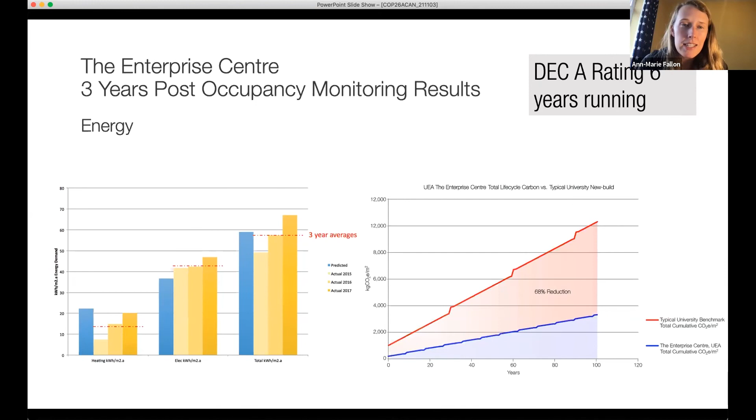A little bit more on how embodied carbon is looked at. We're always very transparent about what parts of the cycle we're looking at with embodied and whole life carbon, and the impact of sequestration, as Andrew mentioned, can be really significant. When we look at that post-life and longevity aspect of what embodied carbon means to materials later on, we need to be careful about how we treat timber and where it moves to or cycles to in a circular economy. So being aware of how figures can be represented.

This building shows you that even with all the low embodied measures we managed to put into the building, we still had a residual embodied carbon footprint. We could try and offset that with more PVs, but we need to be careful about thinking about offsetting, because the embodied carbon of PVs themselves, the minerals in them, where those minerals come from, the mining required to create PV panels - yes they can be cancelled out by the fact that they generate electricity, but they're not totally cancelled out. So we always try to be honest about how we represent that. We went for as low carbon a building as possible, but there is this residual element of embodied carbon left.

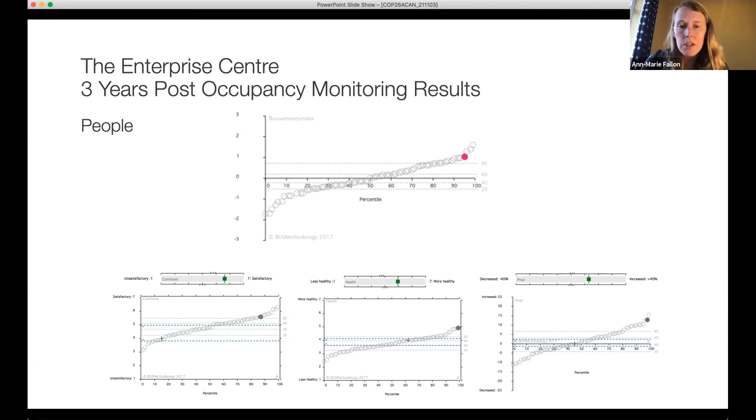We can generate buildings like this that are at a median cost for that era of construction for that particular part of the country, which was really impactful. People are always surprised that this building could be delivered for average university costs for that time.

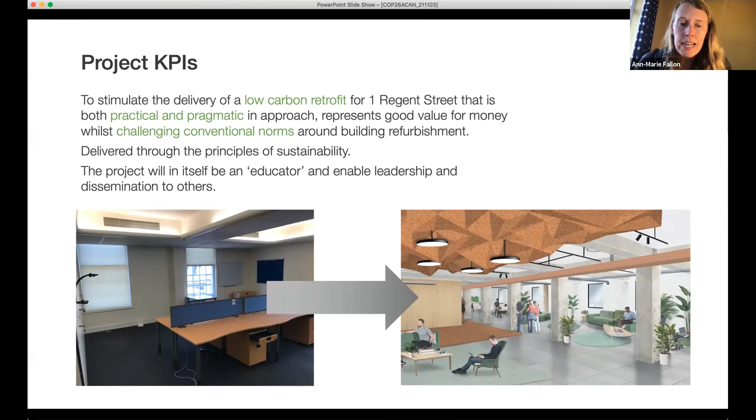So, you know, coming in and putting a load of PIR on the inside of the wall cladding, inside of the interior walls wasn't going to do it for them. A real consciousness around the materials and insulations we're putting in the building was a key driver for this project, which has a very ambitious brief set.

So we also have the WELL building standard that we must achieve, as well as the Passive House certification. You might think we'd spend a lot of time trying to achieve all these standards, but Passive House as a methodology for energy allows us to go a great way on a lot of these journeys.

So I just want to show you this graph here, which I've just pulled out. When we talk about whole life carbon and embodied carbon, the unregulated loads, when we look at operational carbon, is something all of our regulations omit. So anything that talks about net zero carbon in operational terms is usually not considering unregulated electrical energy load. We need to be really careful about accurately accounting for that in our buildings, and we'll show a graph at the end of the whole life carbon impact of that.

So where we're trying to go from - the meter readings on the left showed a figure of over a million kilowatt hours in relation to energy consumption, and we're trying to drive that down. You can see the target value there for EnerPHit Classic, which is where we ended up on this building: 60 kilowatt hours per meter squared, a really ambitious target with a little bit of tolerance. And again, being mindful, like with embodied carbon, of the terminology between energy use intensity, final energy, primary energy, and delivered energy, and how we represent that across our buildings.

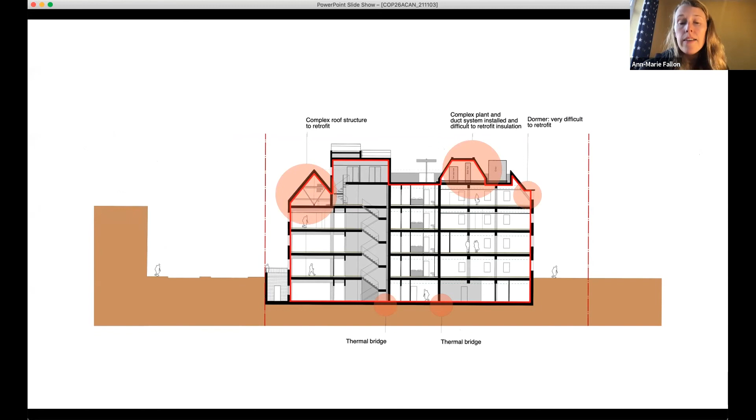We can see that even from the very concept sketches we did at the beginning - the existing strategy where, since it's a listed building, the single glaze sash windows and the internal structure were quite difficult to work around in terms of circulating fresh air, etc. What we tried to do in the proposed scheme is address the fabric from the outside in. We have a healthy level of internal insulation balancing the hygrothermal and moisture risk requirements on the building, and we've tried to centralize the ventilation using a cascade ventilation approach for distribution of fresher air, while addressing the thermal performance in the window zone itself.

This is bringing that sketch on a little further, where we now have a really robust external envelope with internal insulation. Lighting and services efficiencies are improved, and again we're bringing that future whole life carbon figure down and down as we look at this, while maintaining the good parts of the building - the superstructure, the raised access floor - any benefits we can take forward that we have to work with, we're able to do so.

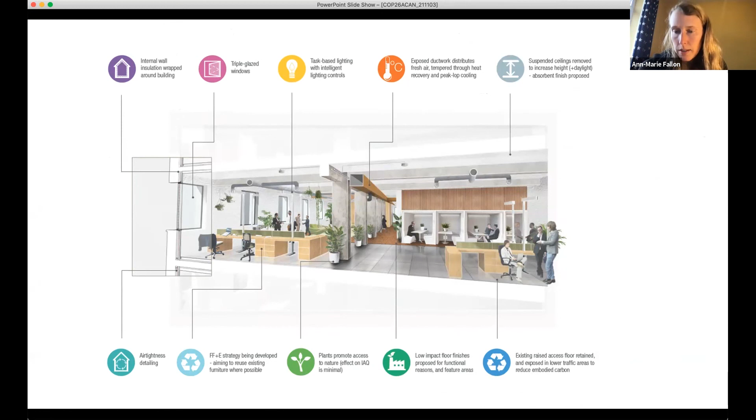I think one of the main studies and outcomes from this project was that we were dealing with a listed facade and a building that had been around for 180 years already. What we were being asked to do was ensure this building would be sufficient, robust and climate resilient for another 100 years.

A huge part of this, because a significant part of the heat loss was through the windows - this describes the process of how we stepped through all sorts of options with the conservation architects, the planners, and our own client team, about how we could get to an energy efficient solution that responded to daylight, to thermal performance, but also used a minimal amount of material.

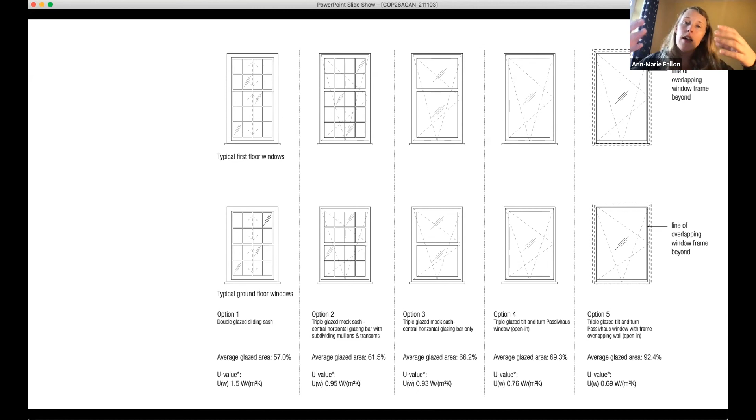From an embodied carbon point of view, if we used a mock triple-glazed sash, horizontal glazing bar window and recreated something that was in the past but for the future, the amount of energy, process, the capital cost, the embodied cost of that was hugely significant for not much benefit. Actually, we'd lose quality of daylighting and we'd have to put extra lighting internally to deal with that fallout when adding internal insulation that would increase the reveals.

You can see the relationship here where we really did need to get to option 5 to get down to the energy target the client wanted. There was also a spin-off benefit: the daylight factor, which was really poor in the building, was able to increase substantially by almost 30% without compromising on any overheating risk. So there was this delicate study done to realize this.

You might think, 'I'm a real conservationist, I don't believe you should have done that to the building, the special character is ruined.' And to a certain degree, yes, the significance of those sash windows has been removed from the building for its new life for the next 100 years. But I'd counter that the Georgian and Victorian eras treated those windows very differently through various periods. It's really a question of what era we want to remain stuck in. If we're dealing with a climate emergency, our buildings also need to evolve, as they always have, to suit and become suitable for those challenges.

Another impact of that was we were able to keep and retain the brick facade, and we were able to almost return to that Victorian dark void where the window is. So architecturally it gave a different value to the building, and you can see that value here as an example.

We're finding this on a lot of retrofit projects at the moment: even though there's slightly higher embodied carbon impact on the building because you're adding layers of materials to make it more thermally efficient, the overall operational emissions reduction, whether looking at a 60-year or 100-year life, is so significant when looking at emissions on its own that it becomes a no-brainer. As Yannick, Kit, and Andrew have already expanded on, it's about trying to communicate that in the most powerful way to the client, which is where I think the real challenges and opportunities lie.

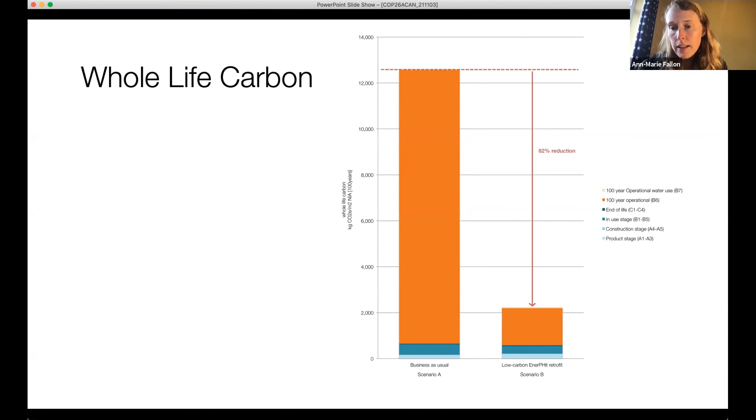Okay, that's all from me. I'll stop sharing and hand back over to the team.

Thank you so much, Ann-Marie. If the laptop wasn't on mute just then, you would have heard a big applause.